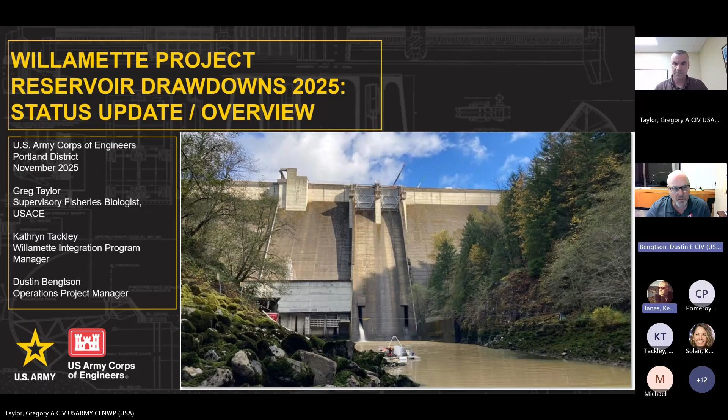Our goal tonight is to provide you, Greg, you can bump to the next slide, or actually we can start sharing the slides. We'll do just a little bit of what folks are used to seeing, a little bit of overview of the project, just to orient folks to what the Willamette Valley Project is, how we operate, and what we're doing. Talk a little bit about our authorized purposes. Go ahead and go to the next slide, Greg. And talk just briefly about how we manage water consistent with our authorizations, trying to meet a number of the objectives that folks are familiar with and maybe some that they aren't. And then we'll talk specifically about our plans for the drawdowns this year.

This is the third season. This view is good, Greg. You seeing it just right? This is our third season of operational fish passage, or drawdowns, as it's most commonly referred to. But there are some significant differences this year, and so we'll want to talk about that, things that we have learned over past years, efforts to adapt our operations to improve on them and mitigate some of the impacts, as well as the continued effort to evaluate their effectiveness. And then, like I said, once we get to the technical presentation, we'll open up the chat and spend as much time as we need to answering questions. All right, Greg, go ahead to the next slide.

Just for general orientation, when I refer to the Willamette Valley Project, most people think just of the 13 dams that we operate. 8 of those facilities produce hydropower. We also have a number of other features that are a part of this project, including mitigation fish hatcheries, an authorization for a navigation channel that is still part of our original authorization. Willamette Falls Locks is a component that was originally a part of the Willamette system, and then a hundred miles of bank stabilization projects, revetments on the main stem and the tributaries associated with the Willamette as well. So a large geography, highly modified system that has been in operation since the late 30s, early 40s in one fashion or another. Next slide.

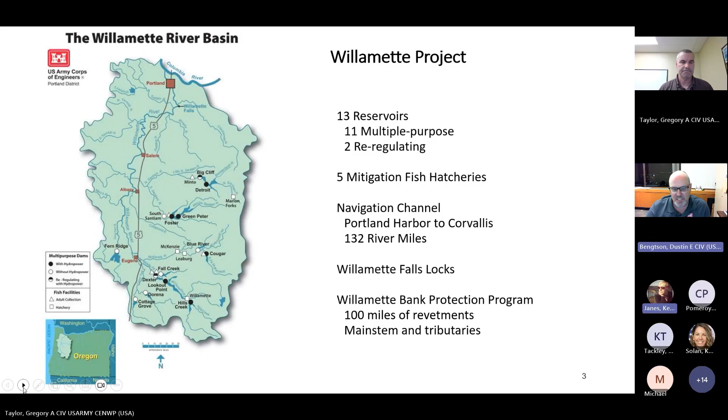I just throw this next slide in because I think it's an interesting reminder of how we got here, right? And how different the Willamette Basin was prior to dam construction, in ways that were good and in ways that were very impactful to people, as the result of a system that flooded regularly and the impacts that it had on people's lives.

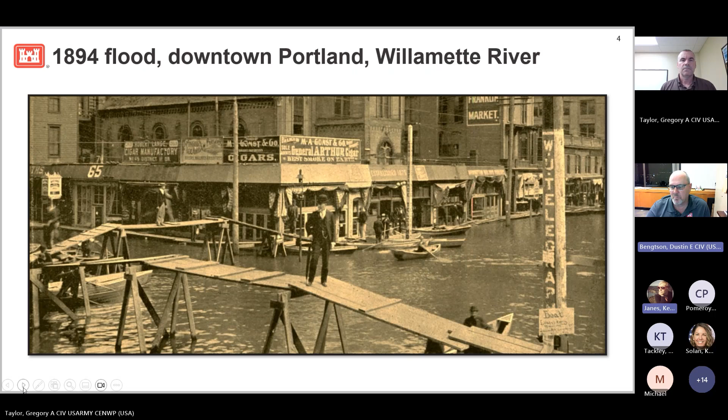Next slide, Greg. You saw a number of authorities, and things that are important for a federal agency. One is an authority, which gives us the ability or the permission to do things. The other is appropriations, the funding to do things, and we'll talk a little bit about both perhaps tonight. But our authorities evolved from the late 30s and early authorizations for flood control dams, the first 7 dams in the Willamette system, construction starting in the late 30s, to authorizations that came in the 50s and 60s, providing the authority to construct the dams as we recognize them today. Blue River being the last dam that was completed of the 13 and online in 1969. This system has operated now with all of those features in place for over 50 years, trying to provide a range of benefits that are identified in these original authorities, these things that we can do or are tasked to do with the infrastructure that we have in place. Go to the next slide, Greg.

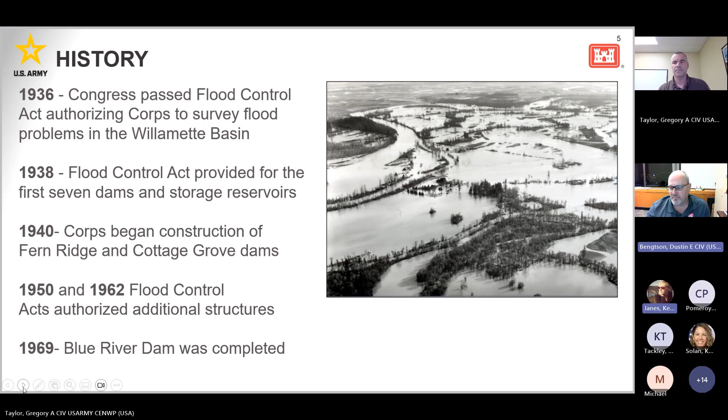The end result of those authorities were these structures that most of you are familiar with. There's two other features. I mentioned that I'm the operations manager for the Rogue Basin as well. We've got 2 or 2.5 dams, if you look at it that way, down in the Rogue Basin. All of these dams are different in different ways. And so what we're trying to do, or what we've tried to do over time, is manage for this range of benefits under our authorities with these very different pieces of infrastructure.

And we're taking things that were contemplated, constructed, and have been operated since the 40s in some cases to try to achieve objectives that we recognize now. And we're using the same infrastructure today that we've been using over time. And that's a challenging thing.

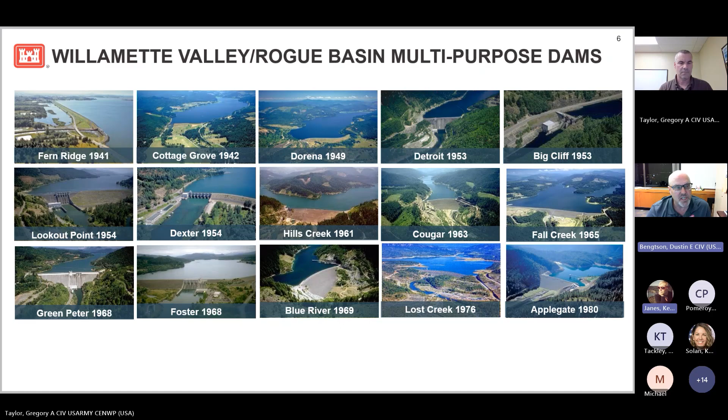The next slide, Greg. So when we talk about authorized purposes or authorities that we operate under, almost everybody recognizes flood risk management as kind of a primary driver for the Willamette system. We have about 2/3 of the population of the state of Oregon, many of them living in or adjacent to the floodplain. The benefits associated with flood risk management are enormous.

Going back to 2019, you've probably seen a briefing before. We had a fairly wet, kind of a small flood event, prevented over $2 billion of damages in a 7-day span. And so as infrastructure and population increase in the Willamette Valley, the risks that we manage around flooding to people and infrastructure continue to grow in terms of their economic benefit.

All of these other authorities or authorized purposes are things that we try to achieve the best balance of benefits that we can within available resources, our legal requirements, and the limitations of our infrastructure. And most of you benefit from these in one way or another, whether we recognize it or not all the time. As I mentioned, 8 of our facilities produce hydropower, not nearly as much hydropower as we had produced historically because we've gone through some significant changes in our operations.

Recreation is tremendously important to a number of our communities, and a lot of our economy has evolved in these smaller communities around recreation opportunities at Corps reservoirs. Our fish and wildlife program, and we're going to talk a lot about that, especially our efforts to address impacts to federally listed fish species, but we also have a number of terrestrial species that we manage on project lands in the Willamette.

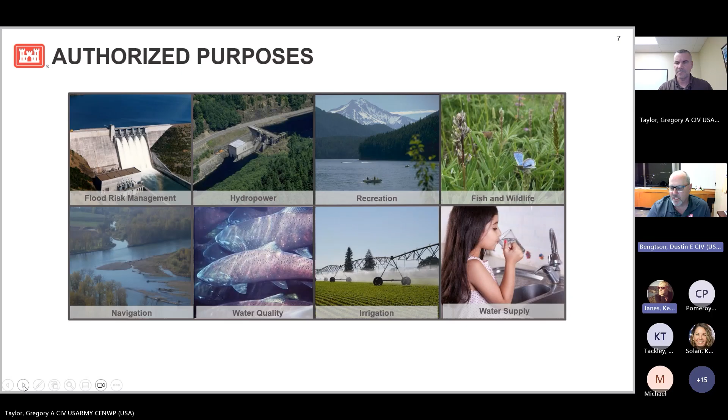Next slide, Greg. Hey, Dustin, just real quick. I just had a person that texted me that said they can hear us, but they're having trouble seeing this. They're not seeing the slides. So it might be worth polling some folks to see if the rest of the group can see the slides. I can see them just fine. I can also turn on settings so people can react and let you know. Just 1 second. Hello, everyone. This is Kelly Janes. I'm helping facilitate. And I don't know if that's specific to an individual. This is being recorded, and we will have that posted. We will also be able to post the slides. So there will be an opportunity to see them if we can't figure out a way to help here. All right. So folks can use that little reaction button at the top. If you can hear us, please give us a thumbs up. A number of thumbs. Okay. Great, thank you. Thanks, Kelly.

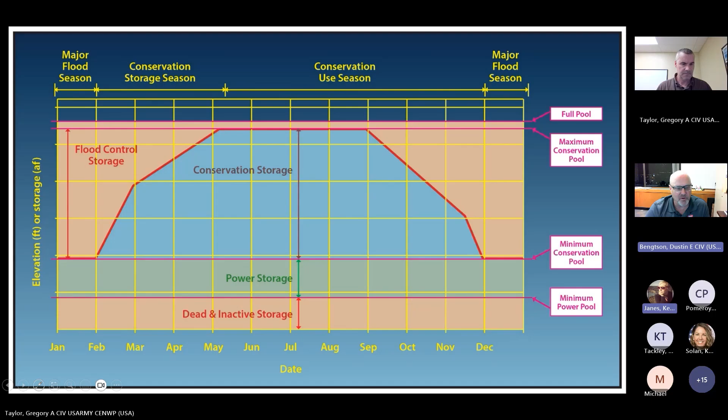So in that gradual refill cycle, we can't get too far out of that authorized curve based on an authority, but also based on a real risk downstream, that if we get that wrong and we can't evacuate that water, we have the risk of doing damages to people's property and potentially to people themselves. So we've got that uncertainty, and then what are we managing for?

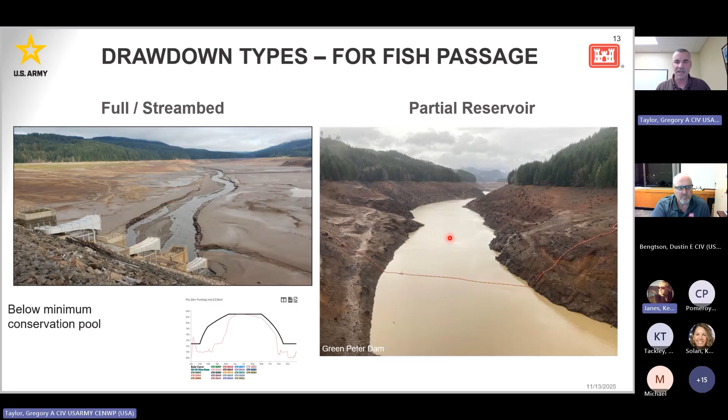So why do we do these? Well, we do them for several different reasons. I mentioned we're doing these seasonally for other authorized purposes. But the recent drawdowns that we've done have really been driven by, in some cases, litigation, but big picture, it's really about ESA compliance. So our compliance with the Endangered Species Act, we have a number of fish species that are listed in the basin. And so we've been trying to reestablish and sustain populations of spring Chinook and winter steelhead

in historic habitats above our dams. And the way you do that ultimately is the juveniles that are produced by putting those fish above the dam have to find their way out. And then they have to survive when they do migrate out of that dam. And so the drawdowns are really a tool to help us do that. On the biological side, they increase what we call fish passage efficiency. That's just a fancy term for helping fish find their way out.

And they increase survival, right? So that's how many fish would make it successfully through the dam in comparison to, say, a baseline operation where we weren't drawing the pool down. And then in some cases, we have some benefits around reduced predation and competition in the reservoirs, mostly around that full streambed drawdown that I mentioned, but in some cases with the partial reservoir drawdowns too.

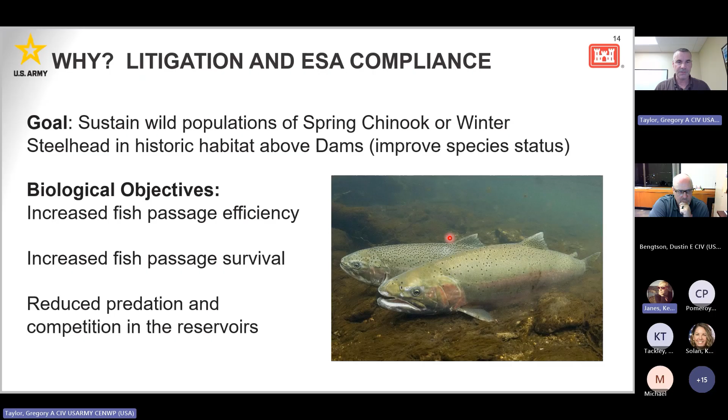Penstocks, this is our intake to our turbine, if you want to think of it that way. And a regulating outlet, which is kind of a lower level way of spilling water out the dam. And so in the late spring and summer, when the pools are full, these juvenile fish that are trying to find their way out of our dams, they're surface oriented.

And so if you've been to Detroit, Green Peter, or Lookout, you may have seen our spillways operating in the spring and the summertime. That really is all about providing a surface route where these fish are in close proximity and a safe route for them to find their way out. And that works. That works in the spring, it works in the summer, and fish certainly use those spillways.

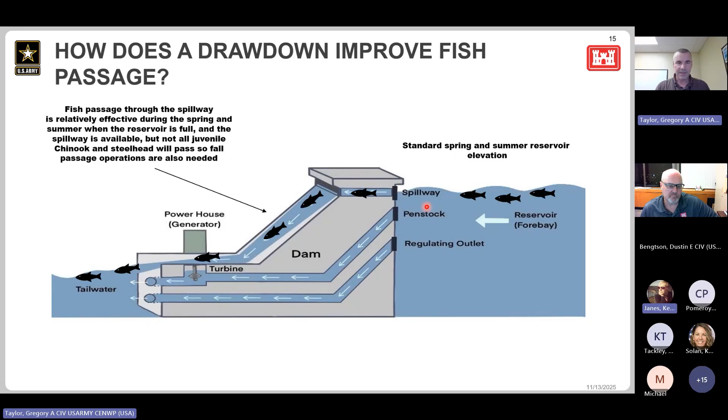But as we bring the pool down, we're really only left with two routes. And so this would be in the fall and the winter. And the two routes that we have at most of these dams are through our turbine units and through our regulating outlets. Our turbine units, it depends on the project. Not all turbine units have high mortality associated with them, and they're very important features for a whole variety of reasons. But the ones at Lookout, Green Peter, and at Detroit do generally have relatively high mortality associated with them. So they're not a safe route typically for fish.

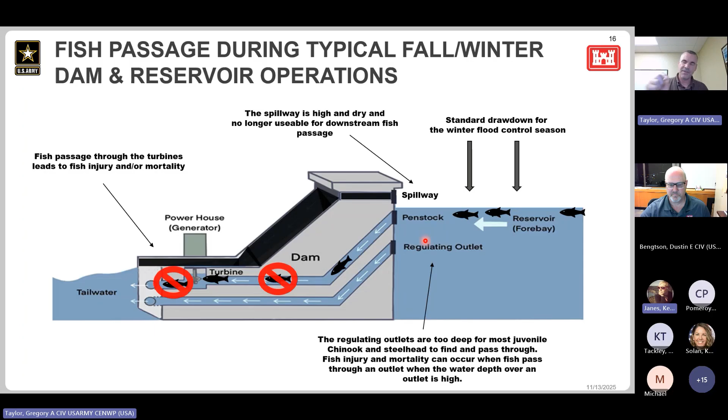The safe route that is available for fish is this regulating outlet. But the challenge is typically those regulating outlets are quite deep, and the fish don't typically find them very effectively. So if you can remember one thing about this presentation tonight, the whole concept of the drawdowns is to just narrow up the distance from where the fish are near the surface to where that safe route is out of the dam. And that is that regulating outlet.

And so we just draw that pool down. And the idea is to just put those fish in proximity of that regulating outlet so they can find it effectively. That's all we're trying to do. It's not tricky. What will drive how far we go down is really where those regulating outlets are in an individual pool. So at Green Peter, they're very, very deep. That was by design because we didn't want them to influence a fish passage device that we had in the reservoir. At other projects, at Lookout and Detroit, they're shallower. And so drawdowns there tend not to be as deep because we don't have to go down as far to put the fish in proximity to find that safe outlet out of the dam.

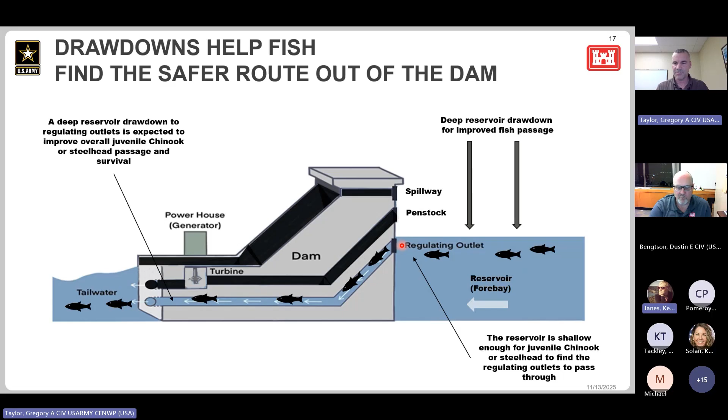We're doing these at 4 locations currently, with the possibility of doing something at Detroit in the fall of 2026. So we're doing these at Fall Creek, I've mentioned that, Lookout Point, Green Peter, and Cougar. The one at Cougar is quite shallow. It's not nearly as noticeable as the Green Peter and Lookout Point drawdowns, but we do have 5 of these that are occurring in the basin eventually with Detroit down the road.

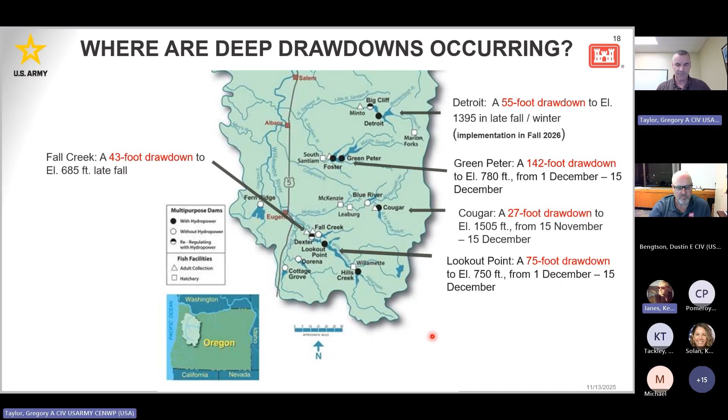But with these drawdowns in place, we're drawing the pool down. Instead of stopping at that minimum conservation pool elevation, we're going 75 additional feet. That puts us within about 25 feet of our regulating outlet gate that I previously showed you on that diagram. So again, it just lowers that depth in the reservoir so these fish can find that safe route out of the dam. At Lookout Point, it's a 75-foot drawdown.

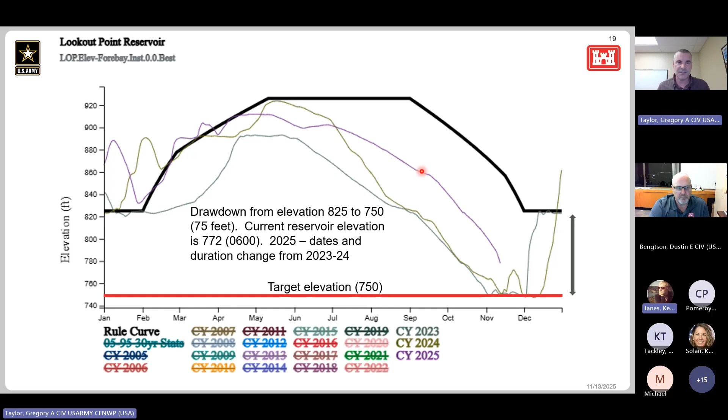Just want to hit on what we've seen with one of the bigger impacts associated with drawing these pools down, which has been the release of sediment. And we measured some of this, at least in the form of turbidity, which is not an exact measurement of how much sediment is passing downstream, but it gives you a sense of that.

And so what we've seen at Lookout Point in now 3 years is that both the duration that we're seeing high levels of turbidity and the magnitude, like how much turbidity we're seeing, is dropping. So if you look at what happened in 2023, here's a measure, and background levels of turbidity in our systems, just to give you a number, 1, 2, 3, really low, as used on this scale. And so we have very low backgrounds of turbidity in our systems.

And you can see during the drawdown in 2023, those levels went up at Lookout as high as 700 in some cases. In 2024, we saw a pretty significant reduction in that, both in the peak number and the duration that we saw high levels of turbidity out of the project. And in 2025 to date, that's your number. You can't even see it. So it's right down there at that background level of 2, 3, 4. We just have not seen the turbidity pick up yet.

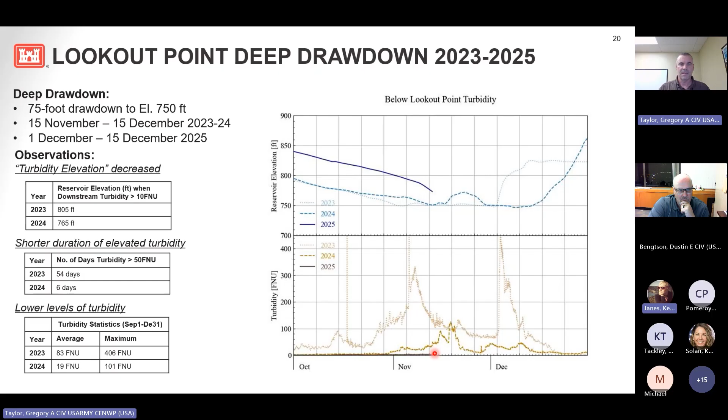Now, to be fair, because we've pushed the operation out to the right, we are at a higher elevation so far than we would have been back in 2023 and 2024 at the same time. But we are still seeing much lower turbidity than we would have predicted based on where we are in the reservoir at this time and what we saw in 2024. So it's a good sign that we're going to end up with another reduction in both duration and magnitude of turbidity at Lookout and at Green Peter in 2025.

So this is Green Peter, and I mentioned that it's a deeper drawdown than what we see at Lookout Point. Again, that's driven only by the depth of the regulating outlets at Green Peter Dam. So this is a 142-foot drawdown from elevation 922. So this is our normal 922 down to 780, within 25 feet of that regulating outlet. And as of today, we're at elevation 826. So we got another 46 feet to go in that drawdown. We're about 2/3 of the way there.

And again, you can see in previous years, in 2023 and 2024, we were already down at the target elevation under those older drawdowns. Again, we're pushing this drawdown out to the right. So we're shooting for December 1st. We're going to hold that for 2 weeks, and then we'll bring the pool back up. How quickly that pool moves back up is driven entirely by Mother Nature. So if we have rains, relatively high inflows to the system, that refill will happen relatively quickly. If it's dry, it'll take a longer period of time. But it will happen starting December 16th at the latest at Green Peter.

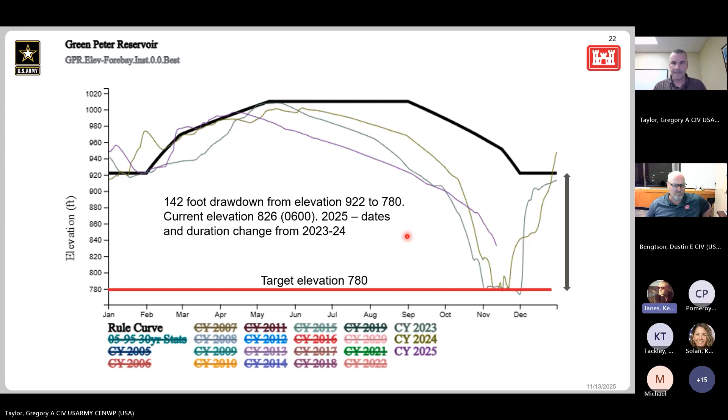Okay, I think that covers it. At Green Peter, again, this is the same graph. You can see the same trend that we saw over at Lookout Point as it relates to turbidity downstream of the dam. So again, under those previous drawdowns in '23 and '24, we saw our highest levels of turbidity associated with that drawdown in '23. Some of these dramatic spikes are typically associated with rain events on top of the drawdowns themselves. That's when we see the absolute highest levels of turbidity being released from the dam.

In '24, we saw a reduction, again, in both duration and magnitude of the turbidity downstream of the dam. And then you can see this line here is 2025. So again, so far, we're doing very, very well in comparison to some of the previous years. And we will see this tick up. How far, for how long, we won't know until we do this.

But the good news is, based on what we saw in 2024, we were expecting the turbidity to spike up around elevation 840 in the reservoir. Again, we're already well below that. And we have not seen that signal spike yet. So that's a really good sign that this continued progress toward a reduction in both duration and magnitude of the turbidity we're seeing downstream of the dams will continue to occur in 2025. Green Peter.

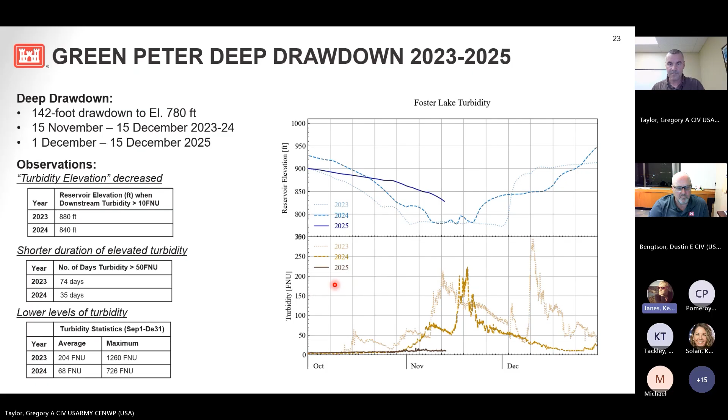All right, I'm going to hit real quickly on water quality. It's mostly around sediment. I just want to make this distinction that, again, when we do this full stream bed drawdown, this is actually a picture from Fall Creek, it is very different. So the kind of sediment delivery that we see downstream on a full stream bed drawdown is really reflective of what's in the river.

So you see gravels and cobbles and sands and sediments. You see this heavy delivery of sediment downstream of the dam. That's not what you see down below the reservoirs where we're doing these partial reservoir drawdowns. And that's, again, because of that residual pool. In a partial reservoir drawdown, if you think about it, anything that passes downstream has to pass through that stagnant residual reservoir first.

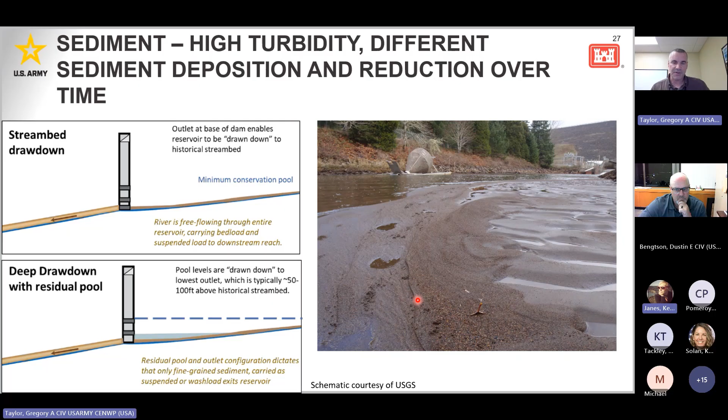So think about a piece of gravel. It's too heavy, right? So once it gets to that residual reservoir, it drops out. But only that really fine clay and that really, really fine stuff is what we typically see then being released downstream of the reservoirs where we have partial reservoir drawdowns. So just wanted to kind of drive that distinction home.

The vast majority of what we see for sediment, when it erodes, it gets put back and kind of resettles out in that residual reservoir. So at Green Peter, this is from 2023, the gross sediment erosion, and this is an estimate, was 4 million cubic yards. But of that 4 million, 3.9 million kind of resettled back into the reservoir, right? So it moved from one place in the reservoir to another and then resettled back out. You can think of the sand, sediments, the gravels, all these things.

Some of it, that fine material, passed downstream and into Foster Reservoir, so a fraction of it, about 500,000. But then Foster captures some fraction of that, right? And so by the time you get downstream of the dam, you have this much smaller fraction, again, made up by that really fine material that actually passes downstream into the rivers below, either Foster or in the Middle Fork below Dexter Dam.

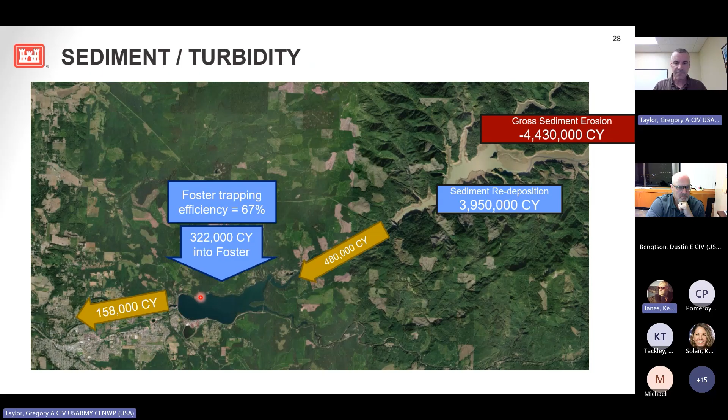That sediment that is in the reservoirs, we've sampled it a number of different times. We've characterized it. The bottom line, without getting into too many details, those sediment samples are below toxicity screening levels for metals and pesticides, those kinds of things. And we will continue to do that over time.

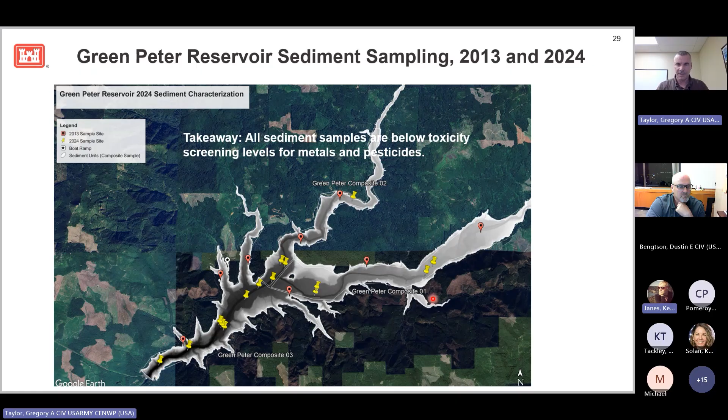All right, a couple of big picture things about fish passage. So this tool, drawdowns, in general, is an effective tool at passing fish downstream. Some of you probably read about the kokanee in Green Peter, and about 1 million kokanee passed downstream out of Green Peter in 2023. These drawdowns are effective at moving a lot of these fish species.

So what we've been seeing with juvenile Chinook, these are mostly the test fish that we've been looking at. When we get these pools down towards those target elevations, the fish passage efficiency, in other words, how effectively a fish is able to find their way out, is pretty high. It does work to do that. And the survival is pretty good. We're still looking at it across the different locations where we're doing this, and there's some complications around that. But suffice it to say, it is much higher than the baseline operation where you would have the turbine unit as your passage route.

We have seen low numbers of naturally produced Chinook at Lookout and at Green Peter in the first couple of years, but that can change, and that varies by year. There's a whole bunch of things that can drive that result. I think anecdotally, we're expecting to see more Chinook this year at Green Peter, just based on some early monitoring that we've been doing. But that's the kind of stuff that we're keeping track of.

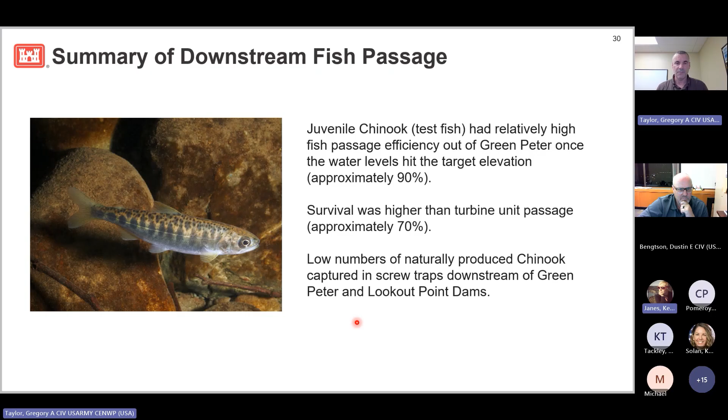All of this we're studying for years, and we're using a variety of techniques to look at downstream fish passage and how these fish perform. A, you really want to do this for a number of years, and B, you want to use a variety of techniques, because each of these techniques brings something to the table that helps you understand how these fish are performing during these operations. And so we're doing that. I won't go into all the details, but we've got a number of techniques in place and different studies that we're doing to evaluate downstream fish passage during these operations.

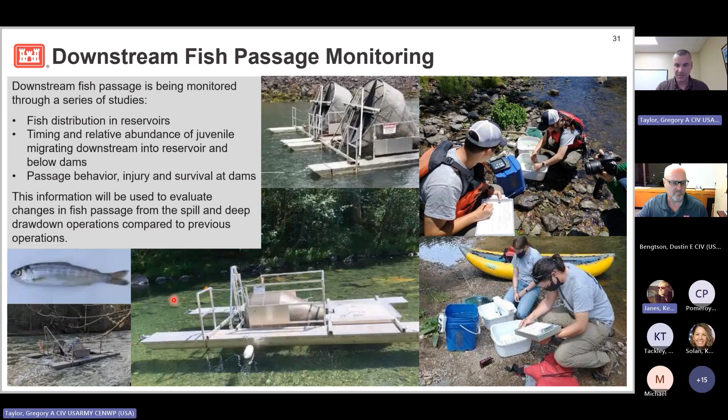We have implementation plans for different activities that we're doing, status reports that we previously submitted that was actually part of a court order, but those kind of lay out the different operations, the different water quality results, different fish passage results that have been observed. You can get current information on reservoir levels or different kinds of turbidity data. So lots of different places you can get information if you want more of that.